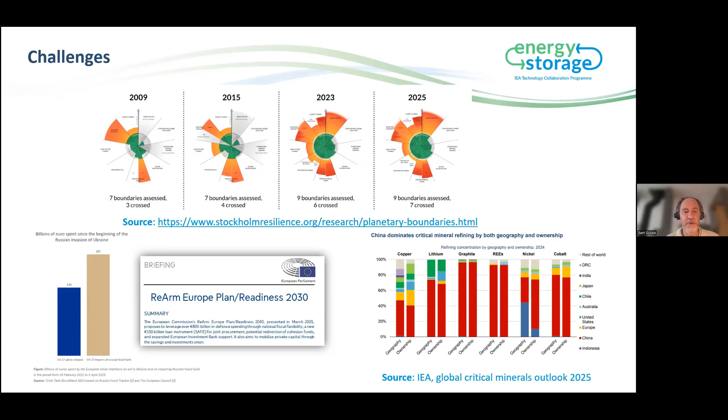In the meantime, the race for critical raw materials is heating up, so we are searching for alternatives. We are also searching for smarter recycling methods, all again to become more independent. And all these factors steer the whole energy transition.

That transition is still driven by one main goal, namely defossilizing our energy system. The transition is built on a renewable-based energy system with electricity at its heart. By now, I think everyone knows that solar and wind are intermittent, so they come and they go. So demand needs to follow supply.

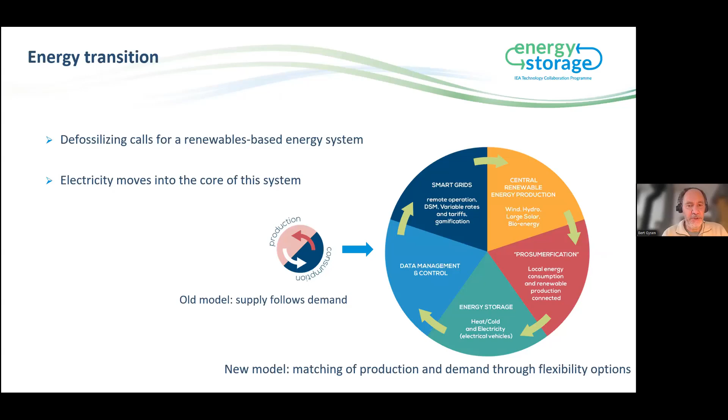At the opening of our Enerstock conference in 2024, I mentioned that providing flexibility will be the biggest challenge in the years ahead. So flexibility will be the new black, the new kid on the block. Flexibility for us can be defined as the ability of the integrated energy system to adjust supply and demand to achieve energy balance across all timescales, in order to integrate higher shares of renewables.

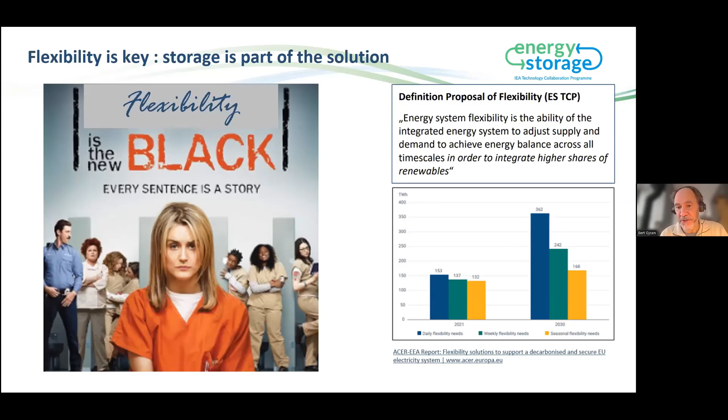At the right bottom, you see that ACER, the Agency for the Cooperation of Energy Regulators, predicted already in 2020, 2021, that the need for flexibility will double already by 2030. And we all know 2030 is practically tomorrow if you talk about research.

So flexibility is key, and there are multiple ways to create flexibility. You have demand-side management, you have curtailment, you have interconnections, and of course also storage.

Some storage technologies are already mature, already on the market, if you think about hot water tanks, aquifer thermal energy storage, or borehole thermal energy storage, if you look at all the batteries which are on the market today.

But nevertheless, there are still a lot of challenges to tackle, like compactness, pricing, charging, discharging capacity, safety aspects, and so on. And also, how about AI, how to integrate it in our Internet of Things, how to create an optimal flexible sector coupling, what's the most optimal market design, and what about all the sustainability aspects? So a lot of challenges, and to solve these challenges, we're gonna call - and that are not the Ghostbusters -

but it is our TCP on energy storage. Our TCP was established in 1975, so we celebrated our 50th anniversary last year, and we work under the umbrella of the IEA, the International Energy Agency.

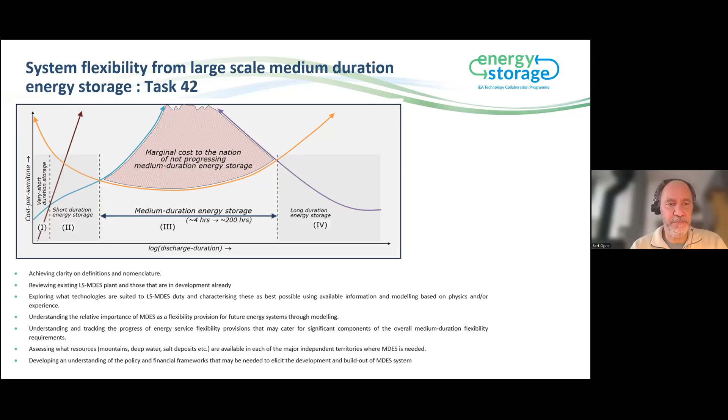The third task is task 45, on accelerating the uptake of large thermal energy storage. The goal here is to provide the framework and the knowledge to enable an accelerated uptake of large thermal energy storage technology by the market. The objectives are further improvement of numerical simulations to have better tools for design, integration, optimization; to broaden a large thermal energy storage materials database and materials test methods; and setting up a base for future standards and performance checks for these systems. Also targeted information and training material for decision makers, implementers, and developers. And if we talk about large thermal energy storage, here we talk about storage capacities more than 1 gigawatt hour.

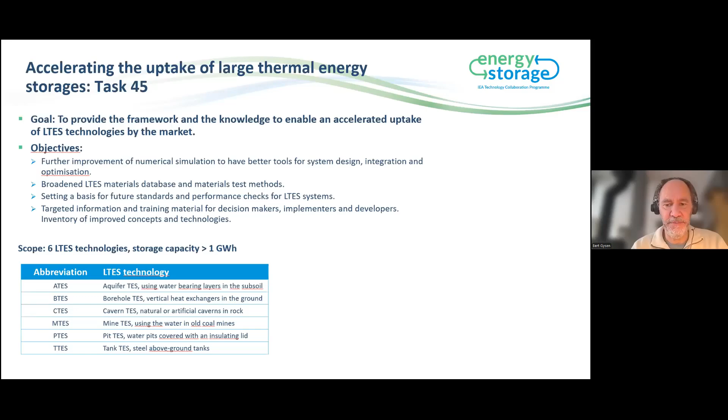The last task, part 1, is task 46. It's a new one, on application-oriented energy storage selection. The goal and the main question is, which storage technology offers the best technical and economic solution in the specific application, and how relevant is the identified application storage pair for the energy system. And here, the direction you look at the energy system is crucial. It gives also different solutions.

You can look from the supply side, and in the past, it was all fossil fuels, and they provided all we need related to electricity, mobility, thermal energy demand. In the future, renewable energy provides most electricity, so you could conclude that there is only a need for electrical energy storage. But if you look from the other side, from the demand side, you see that we need 50% thermal energy, 25% electrical, and 25% mobility. So there is a need for a huge variety of solutions, and you also have to take into account distributed and local systems. So the question is, how much energy do we need, at what time and in what form? And that brings us back to the main question.

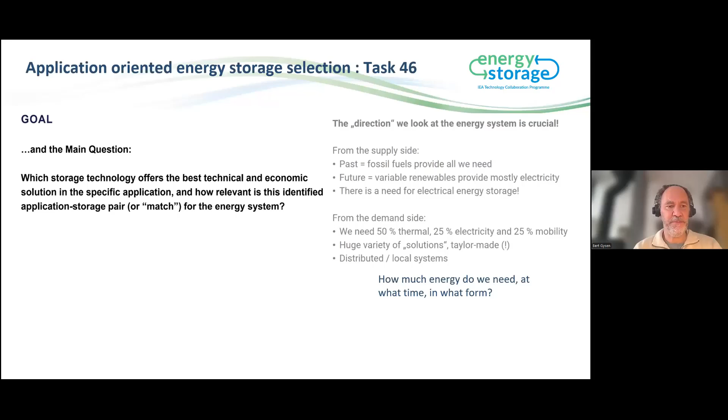We have also today 2 tasks running, which are more technology improvements related. The first one is task 43, on standardized use of building mass as storage for renewables and grid flexibility. Here we cooperate with the EBC TCP, which stands for Energy in Buildings and Communities. The goal is to prepare thermal activated building mass energy storage for widespread, standardized, and economically attractive integration. Task 43 is mainly focused on replication and also takes non-technical challenges into account, including policies.

The second task is task 44, on power to heat and heat integrated Carnot batteries for zero carbon industrial heat supply. The goal is twofold: to identify and assess the role of power to heat and heat integrated Carnot batteries in the energy system, and to strengthen the international visibility of this option and create a common understanding of this potential in industry and policy.

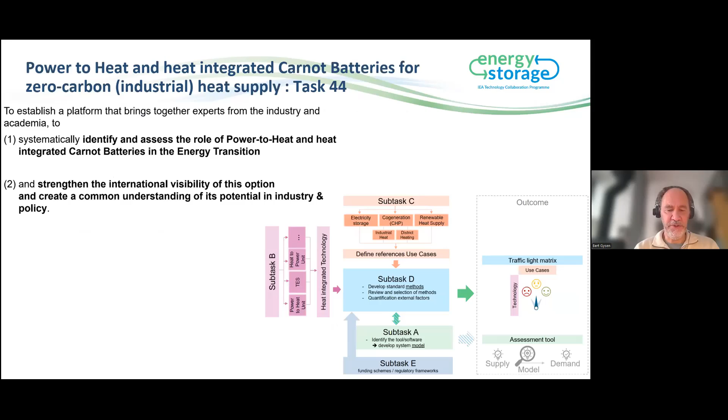To end, we have 2 running tasks on materials and components. First one, task 47, also a new one, is on components for thermal energy storage. It's a cooperation with the SHC TCP, the Solar Heating and Cooling TCP. Scope here is design of heat exchangers and also design of reactors, with a focus on small to large storage capacities, small to large power, and up to 500 degrees Celsius.

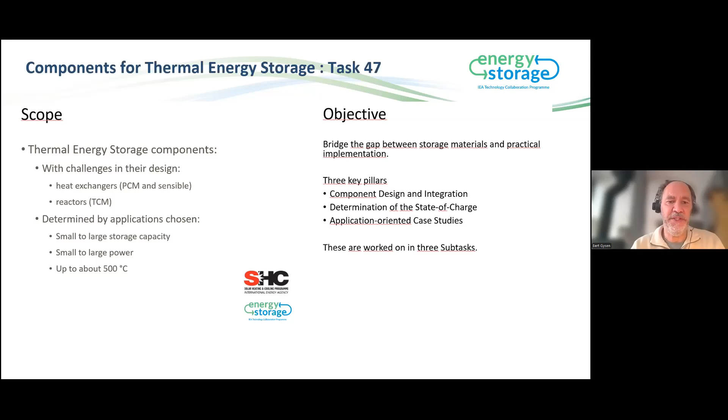So this was a very quick glimpse of running tasks, and you can find more information, also from previous tasks, on our website.

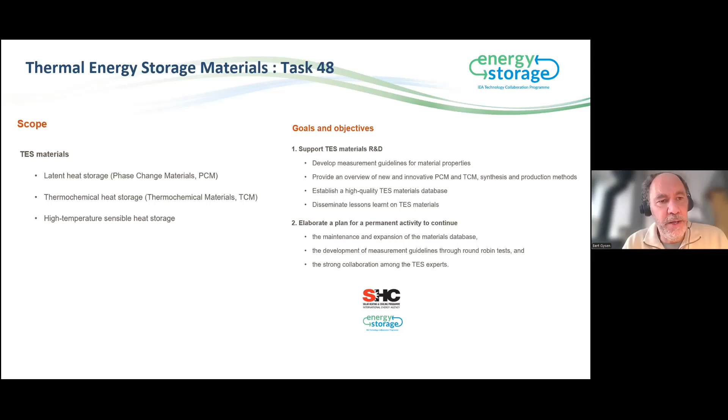It's not only about tasks, of course. We also put a lot of energy into dissemination. It's one of our mission things. So I already mentioned the Enerstock conferences, but we also have our online seminars, and you can find them, they are recorded, always on YouTube. Of course, we are also active on LinkedIn, and we have our 3 monthly newsletter.

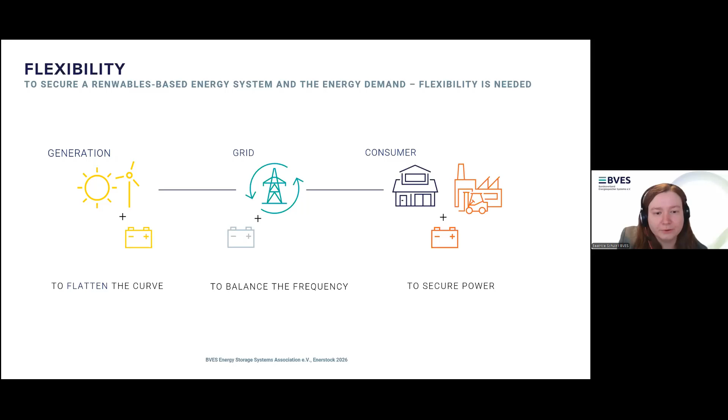The interest to build more storage is growing at the moment, but also to see growth in overall flexibilities from the generation side to flatten the overall generation curve, on the grid side to balance the frequency, as well as on the consumer side to secure power, because now going electric for some of the processes for the overall electrification needs more power to supply for charging of not only personal vehicles, but also large-scale vehicles carrying goods. You need more and more power to supply and serve all these needs.

And we have different flexibility options in Germany. The grid expansion is one of the options you can see. Germany is in a good position for that because we are very interconnected within Europe. So that is one of the options, but not all options are the same. The grid can handle fluctuations and serve internationally, but to do a day-night shift, for example, or a seasonal shift, it gets more and more difficult.

Then we have dispatchable power plants, such as biomass, hydro, but then also things like gas-fired plants. In Germany we have new plants for gas capacities that in the future might also be served with hydrogen, so these gas plants should be compatible with hydrogen as well, but that is also something currently in the plans. Then another solution would be curtailment and remote control of facilities.

Then we have the demand side flexibility, not only for industry, but industry sees it as the biggest demand flexibility option that can be easily used. We are talking about like 7.5 gigawatts until 2045 alone from the industrial sector. And then we have storage in all its forms: mechanical, chemical, electrochemical, thermal, to balance supply and demand during periods of surplus or shortage. So these are the overall flexibility options.

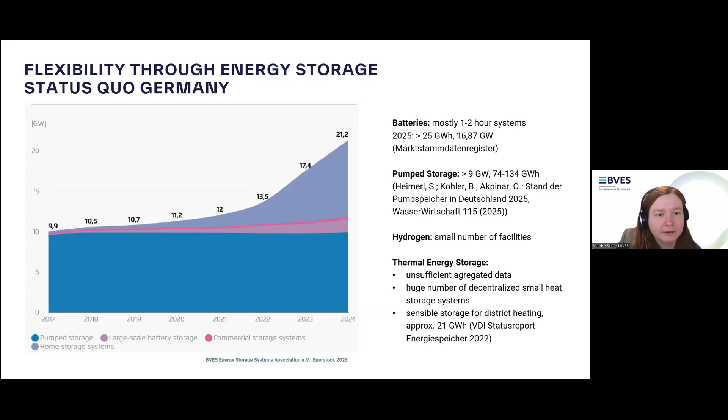We only have some projects of that kind in Germany. What we do as an association is look at all the different kinds of storage systems and what they can do, what the applications are. A good comparison we always use, in Germany but also internationally, is the Swiss Army knife. Germans really like Swiss Army knives because they have so many functions. For a good business case, it's very important that you can do different applications at the same time, or at least with the same storage system, because it makes for a better business case usually.

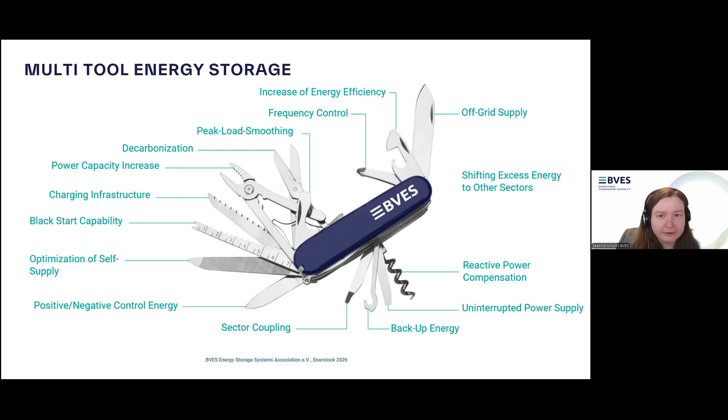It also depends on whether you use the storage system behind the meter, at the customer side, or are directly connected to the grid and serving grid applications. There are a lot of different applications that the storage system can deliver. And we heard from Bert before that it's really important that the storage system really fits the application.

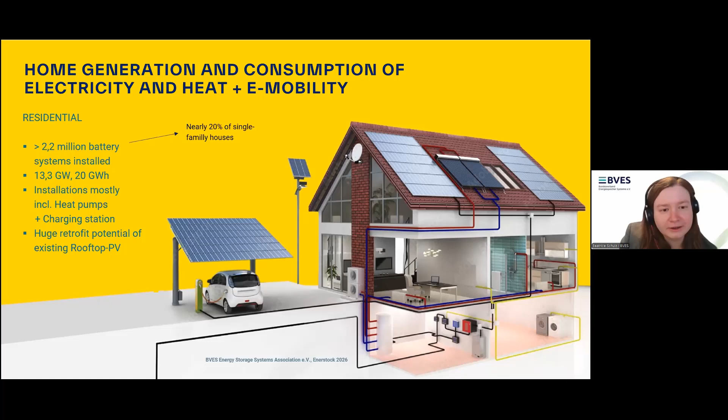There are also some legal difficulties, but that's a new topic. To do a storage system for multiple houses, for example, would be really nice from a perspective of economies of scale, but legally, and also from the cost side looking at grid tariffs, that's a difficult one. Looking into industry, we have around 14,000 projects with batteries.

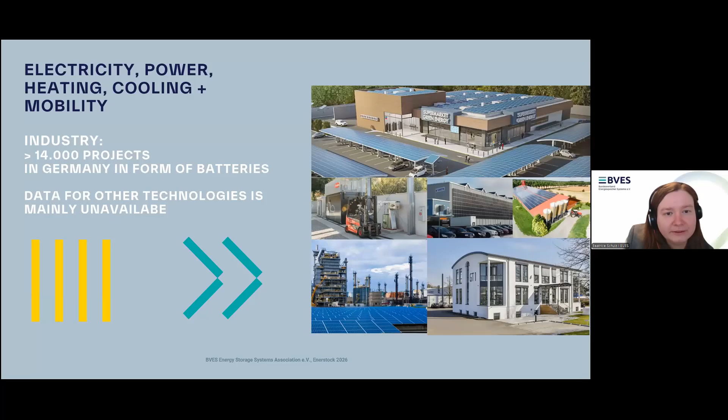For the other technologies, data is mainly unavailable. But what we see in industry is really high complexity, because we have all these different factors to take into account: the different energy needs for heat and electricity, the overall possibilities of electrification. We have a lot of different temperature levels for process heat that are needed, different load profiles, some with production on site, whether renewable or conventional.

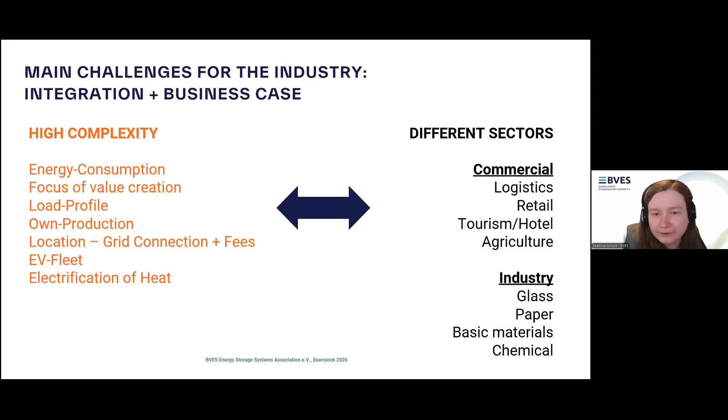And then there's a focus of value creation. These industries want to make money selling their goods, not specifically looking at how to save money making them, so there needs to be a shift in focus. A lot of things are happening now, but here are some of the industries of major interest for the storage industry in Germany at the moment.

The white elephant in the industry sector really is heating. In the end, a lot of industrial energy demand in Germany is process heat, and batteries might not be the perfect solution for that alone. So we have different options looking at direct electrification, taking the energy from the grid.

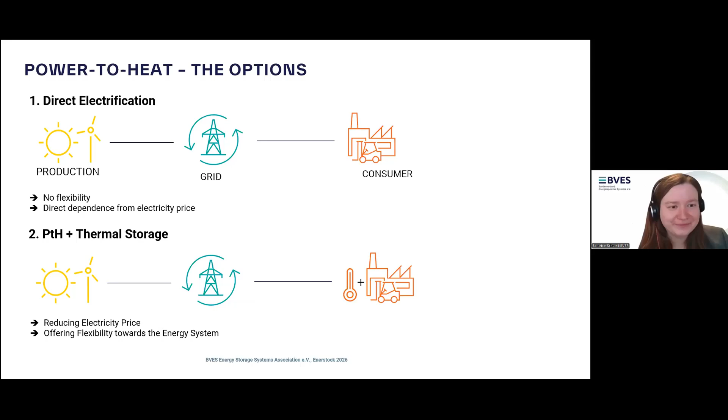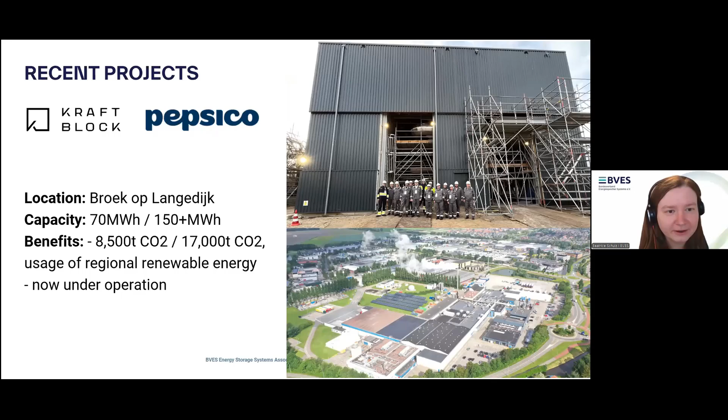And then we have electrification also taking into account thermal storage. Thermal storage systems for industry are the next thing coming. We can see here a project by the company Kraftblock in the Netherlands. It's a German company doing a power-to-heat storage technology for high temperatures.

We now see also a project by Energy Nest, currently being built in Germany. And we see a lot of projects with batteries, for example for depot charging solutions, supplying power to charge different cars at the same time and charge them fast.

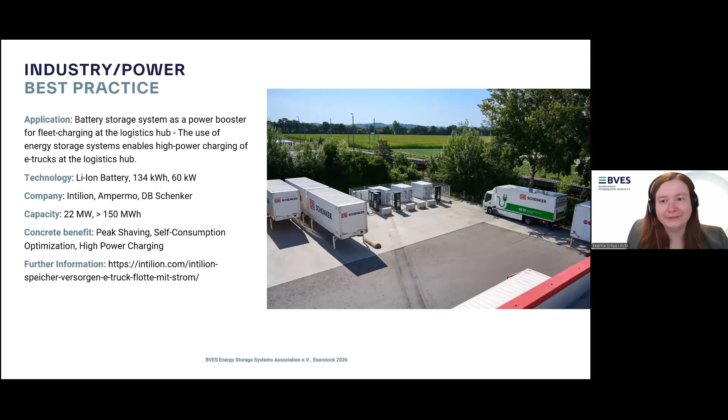Looking into the large scale segment, we see a lot of pumped storage and now an increasing number of batteries. The battery sector especially is at the moment the one most in the media, because the markets are quite attractive. You have a multi-market approach you can use, and we have a really large electricity market, the largest one in Europe, with even more growth rates.

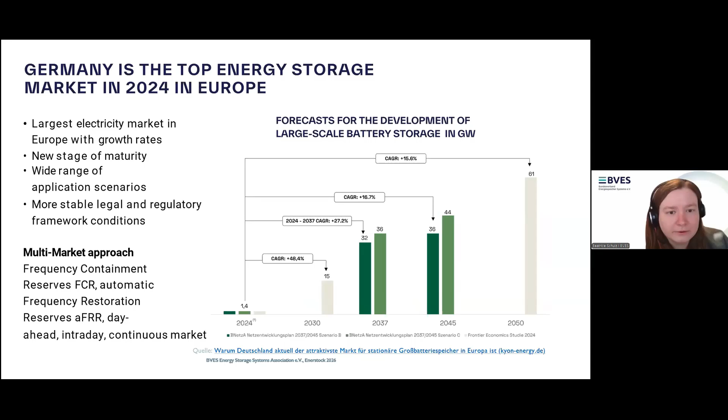Technologies are more mature, for example. So that is something where we will see a lot of growth over the next years, if these systems are being able to be connected to the grid, which is one of the difficulties we see at the moment. To have them all being connected to the grid, that is something that is currently being worked on.

Here is one of the largest systems now in operation in Germany by the company Eco Stor. It's a lithium-ion battery with more than 100 megawatts.

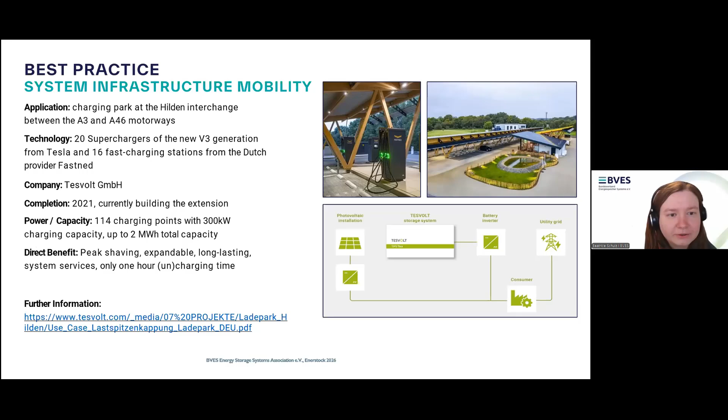We also see some projects in charging infrastructure for system infrastructure. So here's a battery that can not only deliver the power for charging, but also do peak shaving, for example, and can deliver system services and so on.

So maybe to wrap it up now, a lot of projects are now coming in Germany in the battery field, but also more looking into thermal storage. Some of the reasons are that Germany is now working on a new grid fee structure, so this might shift some focus also for the industry, but also for the large scale segment. Germany is also working on a capacity mechanism and market where storage should be able to take place in.

We have a new government that focuses more towards reliability and more conservative technologies, but at the same time, the topic of reliability is something that storage can serve perfectly. So it is also a topic of energy security, energy independence. Storage fits quite well into this focus.

We are now seeing a shift in how grid connections should take place. This is also something that we've seen from other countries as well. A shift in renewable funding that might not be as granted anymore in the future. So storage, also co-located with renewable production, might become more and more important to have a sustainable business case for renewables. Co-located storage is one of the main focuses in this new government and also in the coalition treaty that we see. But in the end, we need storage on all levels, whether it's being bundled or not bundled with generation or usage of energy.

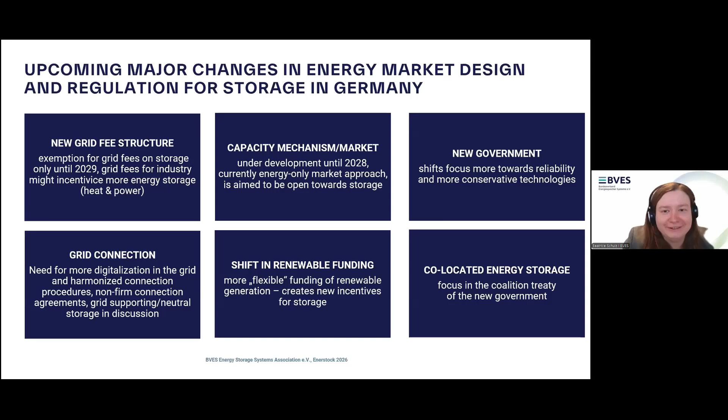And that's it from me. I've seen the sign from you, Stephanie. I hope I'm not too much over time, but thank you for now. Thank you as well, Beatrice. No, don't worry, I think we can handle it. And I have to apologize, I didn't introduce your affiliation in the beginning. So Beatrice is the head of the Department of Technologies and Markets at the BVES, so you know exactly what you are asking for. Sorry that I did not mention it before.

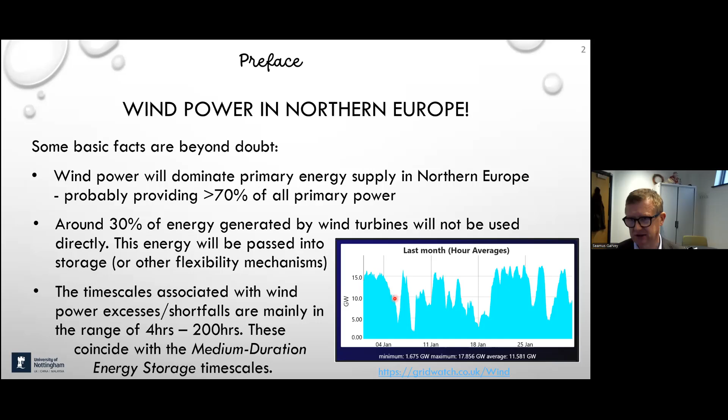We had a very good month in January because of all the storms, but you see the wind doesn't come and go in at 1, 2, or 3 hours, and it doesn't stay gone for more than about a week, which is under 200 hours. Now, I'm passionate about medium duration energy storage, which is storage that can discharge continuously for periods between 4 hours and 200 hours.

I have written a tool with others that enables you to look at a pattern of net demand, the difference between energy demand and energy supply in the future. You look at this pattern and decompose it into all of the energy, into packets of energy that come out in periods of continuous discharge of various different lengths. This image is an outcome from that package.

What you see here is that virtually all of the energy that comes out of storage is the area underneath this curve. Virtually all of that energy that will come out of storage in the future will come out in the medium duration range of times, 4 hours to 200 hours, in my opinion.

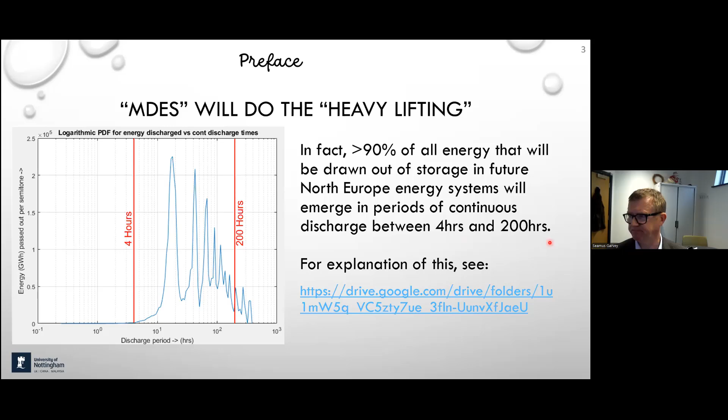There's a lot going on about medium duration energy storage. I have set up, in conjunction with Task 42 of the TCP on energy storage, the MDES Alliance, and I encourage everybody who's online to think about joining, because it's a very important community to push forward the interests of medium duration storage and flexibility, actually, not just storage.

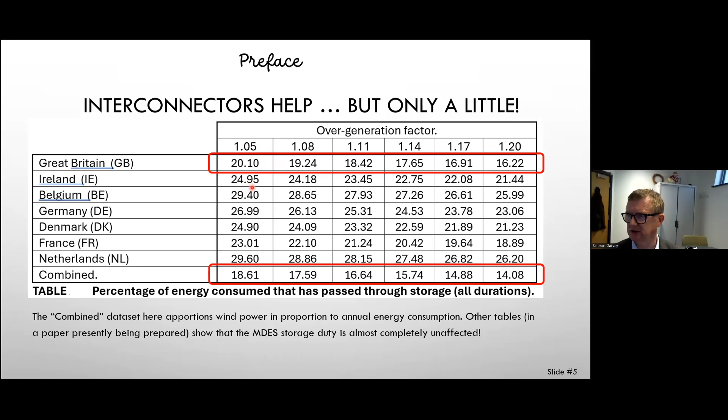A key point I wanted to make is that the technologies most suited to storing energy for this medium duration range are mostly mechanical technologies. I forgot to say at the beginning, I'm a mechanical engineer, professor of dynamics, with 40 years of experience as a mechanical engineer.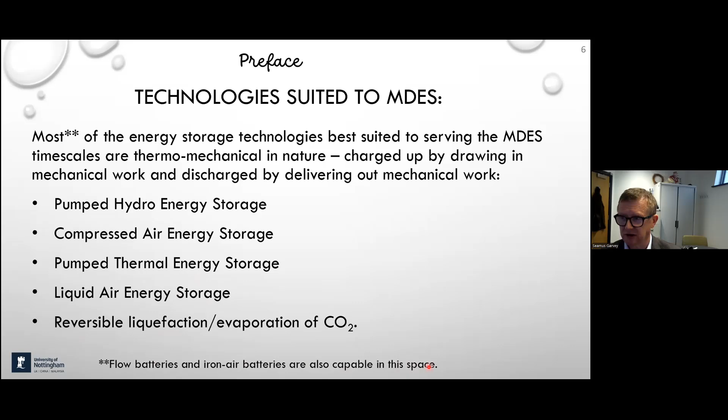The kinds of technologies we're talking about are pumped hydro, pushing water up a hill; compressed air storage; pumped thermal, doing a reversible heat pump and heat engine combination. There are two more esoteric ones: liquid air energy storage, and reversible liquefaction or evaporation of CO2. I'll also mention that flow batteries and iron-air batteries are capable in this MDES space. But I want you to focus on the fact that most of the solutions are mechanical in nature.

That prompts an obvious question: if the technologies suited for most of the variability that happens with wind power are mechanical in nature — meaning you charge them up with mechanical power and discharge them — well, please recognize that wind power is itself a mechanical power form.

So does it really make sense to take 30% of all of the rotor power gathered by wind turbine rotors and convert that 3 times? Does it make sense to take mechanical power and turn it into electricity in the wind turbine, then turn it back into mechanical power to charge up and discharge storage, and then turn it back into electricity? The answer is maybe it makes sense, but maybe there's something better that can be done.

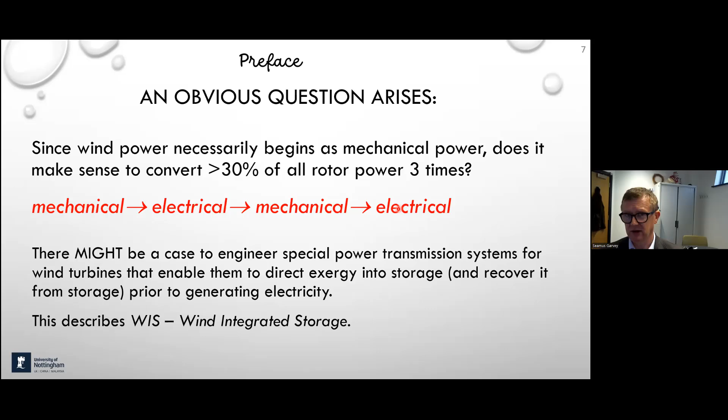That's the key to why I'm so passionate to explain that there is a possibility of doing something different. That different thing is wind integrated storage, where you have the potential to put energy into storage before you make electricity. And that's the key point - putting energy into storage before you make electricity. If you understand electricity systems properly, you realize this is how electricity systems have always worked.

A little contrast here. This graphic shows the conventional approach to thinking about wind turbines and the energy system at the moment. We have a wind turbine rotor that gathers power. We may have a gearbox, or we may just make a generator, and out of this comes electrical power. If we want that electricity directly, we consume it. If we don't want it directly, we convert it into something else, store it, and bring it back from that something else. That's not an insignificant amount of power - it will be in the order of 25 to 30% of all wind power going via this route.

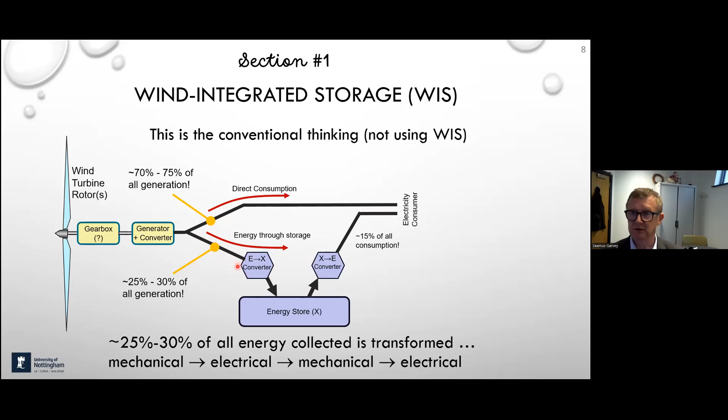There are two main observations you should see there. First, we have to pay for these machines to convert the energy into something you can store and then back again. Secondly, you have to suffer the losses, because every time you convert energy, you lose some of it. So the contrasting arrangement is this.

This is what I call wind integrated storage. You gather the mechanical power in some form that I simply call X here, and it's a storable form. If you want electricity directly, you convert X into electricity. And if you don't, you pass X through storage and then fetch it out later.

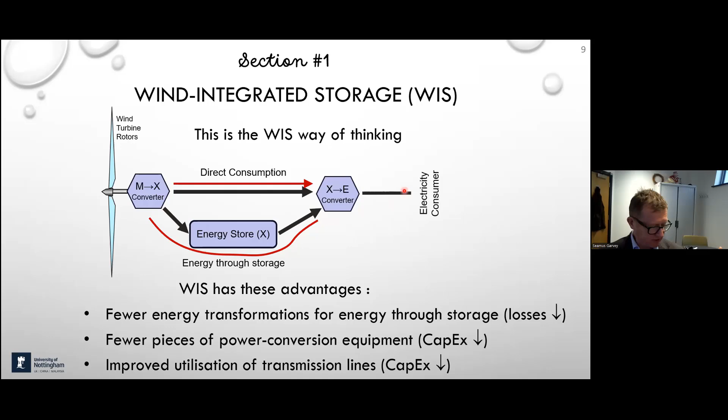As with the previous diagram, there are two paths for energy here. There's the direct path from the wind turbine rotor to electricity, and for WIS systems, that path will be less good than a conventional wind turbine. But there's the second path where you go through storage, and for wind integrated storage systems, this path will be much better than the other arrangement where we simply say the wind turbine made electricity and now we're going to store it when we don't want it.

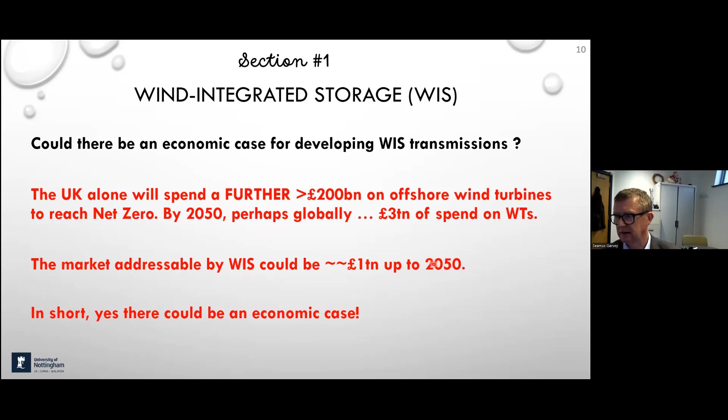Most people would say, well, we've got wind turbines that work perfectly well already - could there be an economic case for developing some new machinery? In my opinion, it's a slam dunk obvious yes. I'm a little bit UK focused in this presentation, but the UK on its own will spend at least 200 billion pounds more on offshore wind turbines to reach net zero, hopefully by about 2050. Globally, the spend on wind turbines will be in the order of 3 trillion pounds, so probably close to 4 trillion euros. The market addressable by WIS could be a third of that potentially. So in my opinion, yes, there could be an economic case.

Now, I'd love to talk at great length about the technology. In fact, there are 5 different ways that I know of that you could implement wind integrated storage. I'm just going to give you the very shortest hint about one of them. In this case, the wind turbine rotor doesn't drive a generator directly - it in fact drives a kind of gearbox.

The gearbox is formed by having a compressor here that compresses helium gas and an expander at the other side that expands that helium gas. The combination of the compressor and the expander gives you a gearbox whose ratio you can change. The expander drives a generator, and the generator can always run at a constant speed.

Now, the helium gas is a very strange application here, because the helium gas, even on the low pressure side, will be about 90 bar, so moderately high pressure. On the high pressure side, it will go up close to 1000 bar, which is very interesting engineering pressure, but certainly well within manageable limits for engineering. So we have a high pressure loop here that's a bit like hydraulics, except that the fluid going around is a gas. And because it's a gas, when we compress it, it gets hot.

And when we expand it, it gets cold, and we have the capability to take out hotness on the hot side or take out coldness on the cold side. And that gives us the ability to put energy into storage or take it back out again.

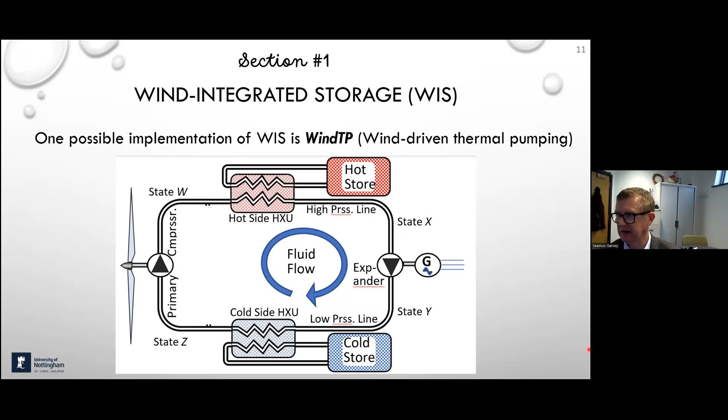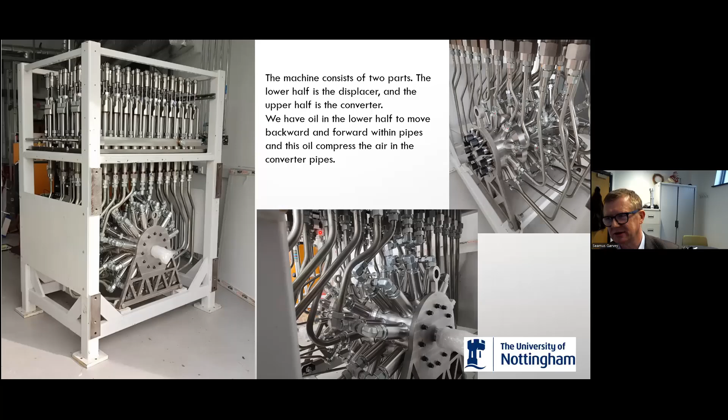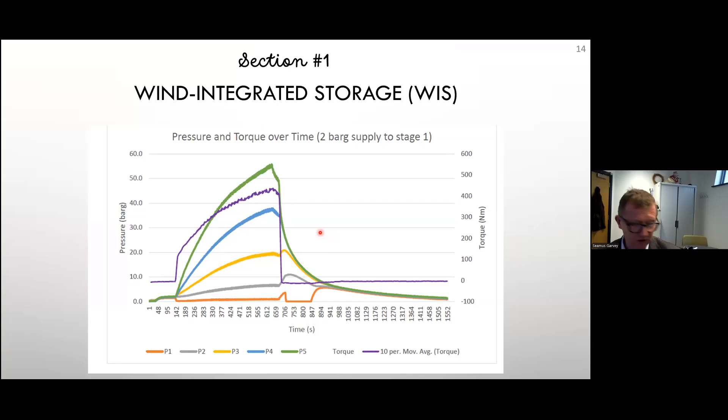There's no time to explain this very nice animation. I have built one of these machines so far, version 1. Version 1 has taught me a number of lessons, not least about complexity. This is a very complex arrangement, which is not really practical as a first installation in a wind turbine, but it's established some principles. I have tested that machine compressing air, not helium, and it works fine, but a bit of simplification is required to make something you could actually realistically put in a wind turbine.

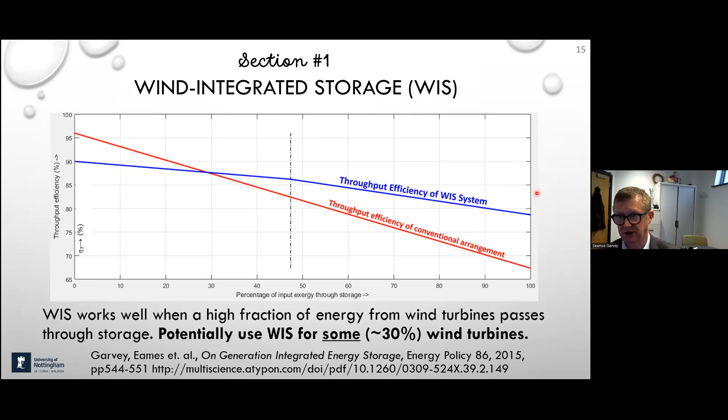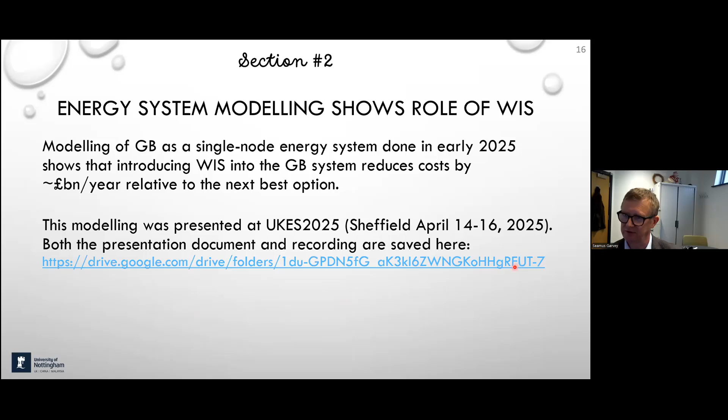Finally, just a little note about what modeling shows us this could do for the UK. I modeled this — there's a link there to a paper I gave in April of last year, so you can follow that link and find the whole paper. But here's the summary set of results.

If you were operating a UK system on hydrogen as the only energy storage mechanism, your average cost per year for that energy system would be 52.6 billion pounds. Probably best to look at pounds per megawatt hour. If you add in compressed air energy storage, you improve matters a little bit and save 2.16 billion. If you now take away the compressed air and add in WIS, you save a little bit more. And finally, if you add in WIS as well as compressed air, you still save a big chunk of money per year. Okay, I'm just on time.

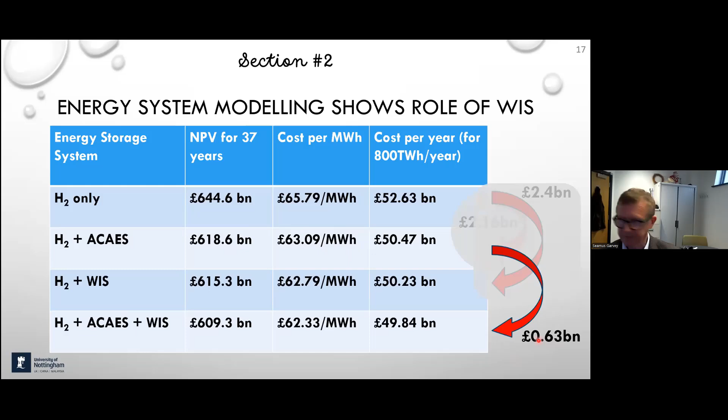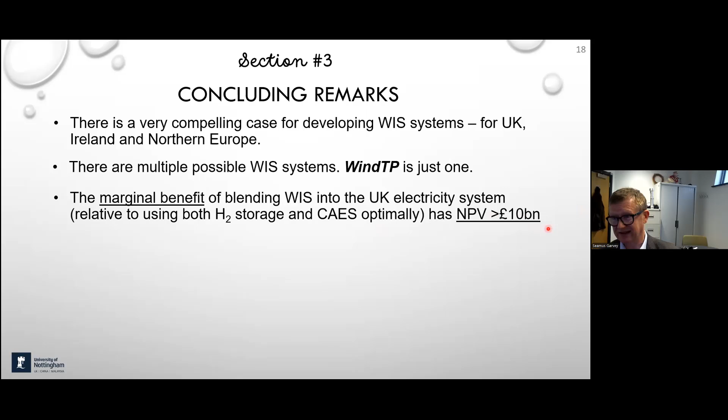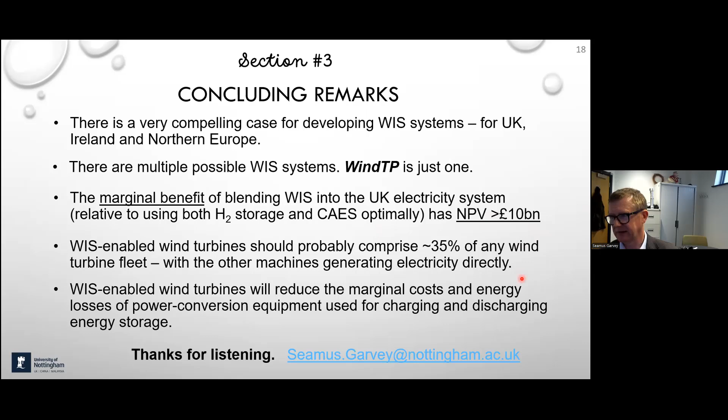So my conclusion is there is a very compelling case for developing WIS systems for the UK, Ireland, and Northern Europe. There are multiple possible ways that you can do that — WindTP is just one. The marginal benefit of blending WIS for the UK has a net present value of more than £10 billion. And WIS-enabled wind turbines should only ever comprise perhaps 30 or 35% of a whole fleet. Thank you very much for listening, and here are some useful links that might be relevant.

Thank you very much, Seamus. I think this is very... I can imagine some people will have questions because there is a lot of novelty in it. So many thanks for it.

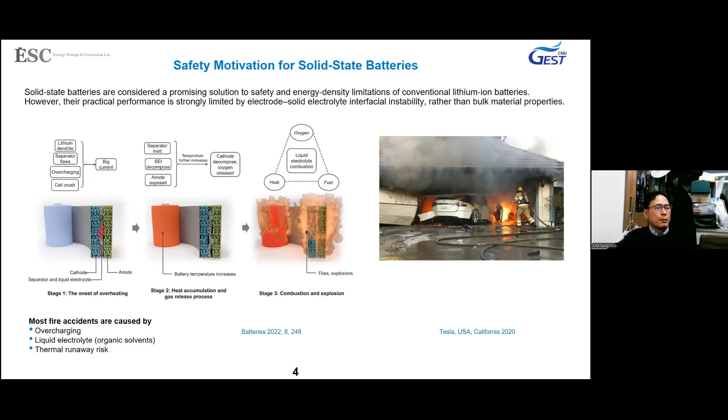However, safety improvement is not enough. The performance remains limited. Anyway, solid electrolytes allow batteries to operate with improved safety and wide voltage range. This makes them promising for high energy density and high power applications. Despite this advantage, solid-state batteries still face serious performance limitations, most of which originate from interfacial problems.

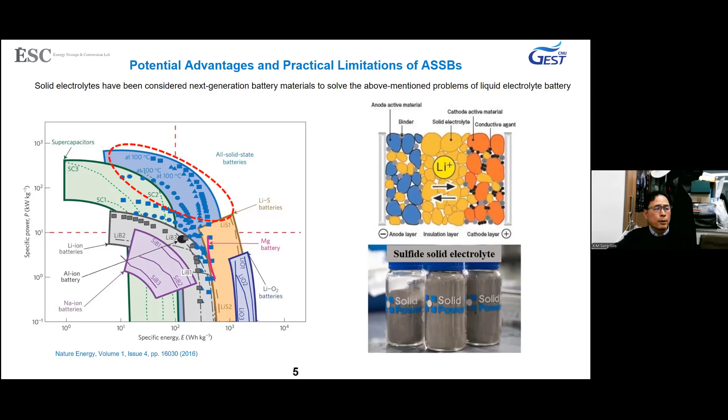High energy density requires advanced electrode materials and a stable electrolyte. High nickel cathodes are one of the strategies to improve energy density, but even with advanced materials, energy density gains are limited by poor interfaces. Therefore, interface optimization is just as important as material selection.

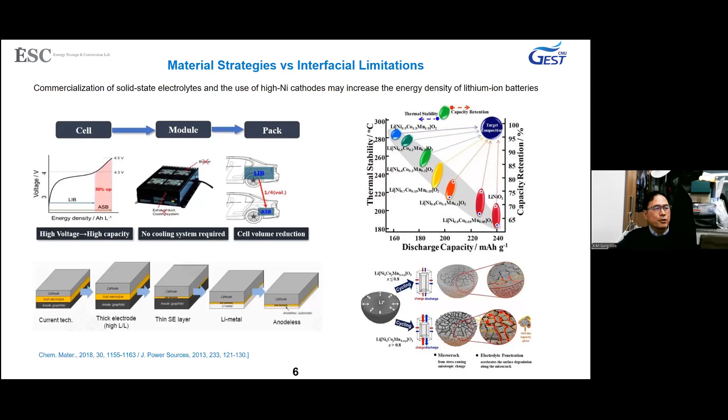In solid-state batteries, lithium ions must pass through the solid interface. This interface strongly influences ion transport. Even small interfacial defects can significantly reduce battery efficiency. As a result, interfacial properties often dominate overall battery performance.

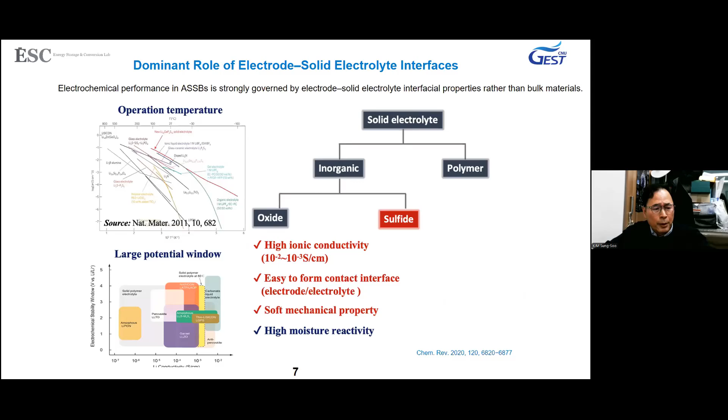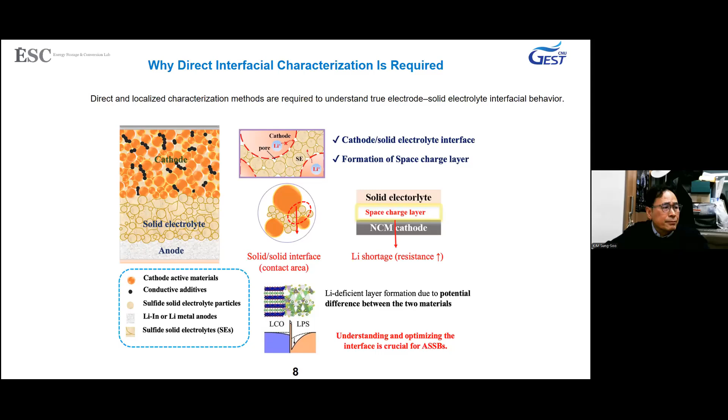So we have adopted the following approach. To study the interface directly, we simplify the system as much as possible. Instead of the full cell, we focus on a small, well-defined contact area. This approach allows us to isolate the interfacial behavior.

Lithium argyrodite was commonly used as the solid electrolyte with high ionic conductivity. It was synthesized using the solid-state reaction method. Phase purity is important to ensure reliable electrochemical performance. This ensures that the observed behavior comes from the interface, not electrolyte degradation.

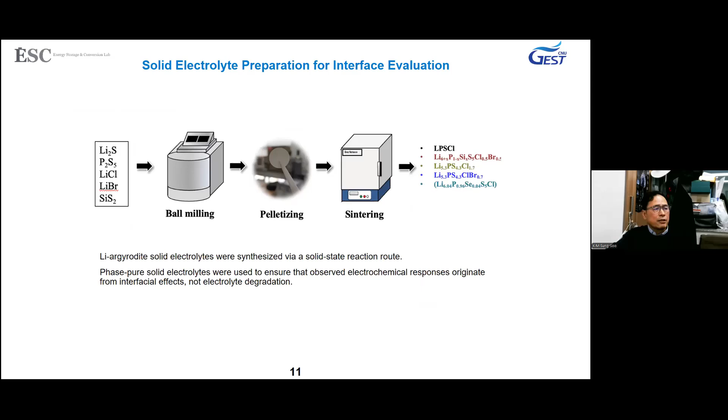A microcavity was formed to control the contact area between materials. This geometry allows precise interface formation. It improved the reproducibility of interfacial measurements. The microcavity helps reduce uncertainty in experimental results.

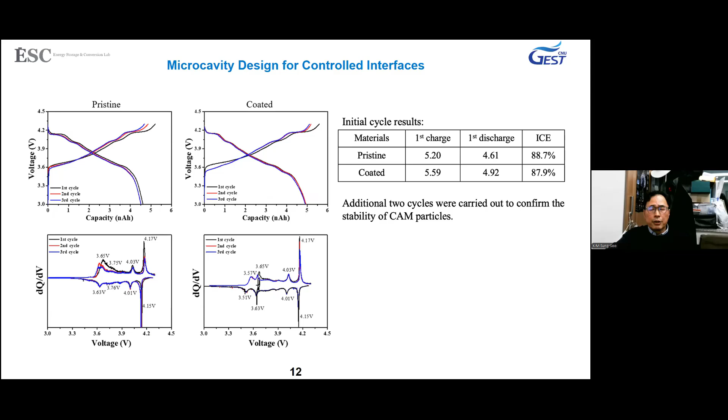This slide shows how the microcavity structure is applied to the solid electrolyte. The goal is to create stable and well-defined solid-solid contact. Such contact is critical for meaningful interfacial evaluation. Poor contact can lead to misleading electrochemical results.

In these sections, we focus on interfacial electrochemical behavior. The results highlight how the interface affects resistance and ionic transport. The discussions emphasize trends rather than absolute values. This trend helps us understand the key interfacial mechanisms.

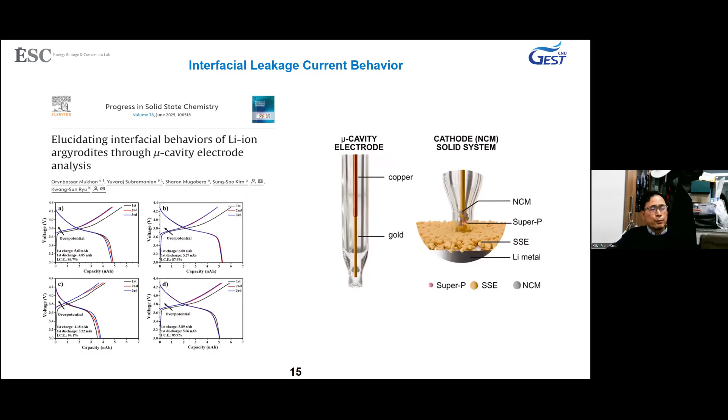The microcavity electrode allows us to measure leakage current at the interface. Leakage current indicates unwanted side reactions. Lower leakage current suggests better interfacial stability. This information is important for improving battery performance.

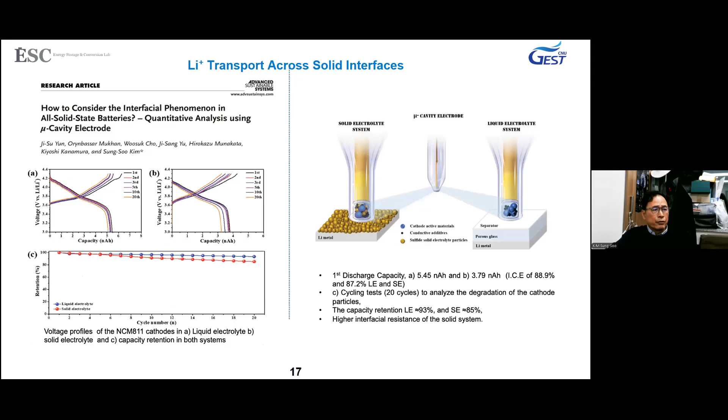Here we focus on the lithium ion transport behavior. Efficient ion transport is essential for fast charging and discharging as well. Interfaces often act as a bottleneck for ion movement. Understanding this effect helps guide interface design.

This also shows a typical result from this study. This result demonstrates how interface structure affects performance. Even small changes in contact quality can lead to large performance differences. This highlights the sensitivity of solid-state battery interfaces. Proper interface engineering is therefore very critical.

Finally, I want to present some conclusions. The key takeaway is that the interface dominates solid-state battery behavior. Bulk material properties alone cannot explain performance limitations. Direct interfacial analysis provides clear insight. This understanding is essential for next generation batteries, especially for solid-state batteries. So thank you for your attention.

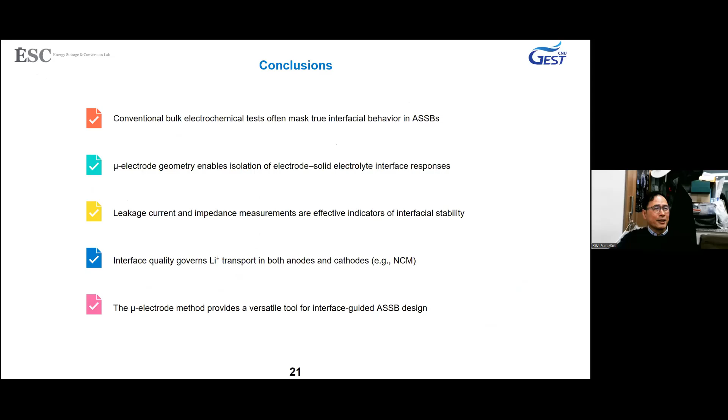Okay, thank you very much, Kim. I was too slow to open my microphone, sorry.